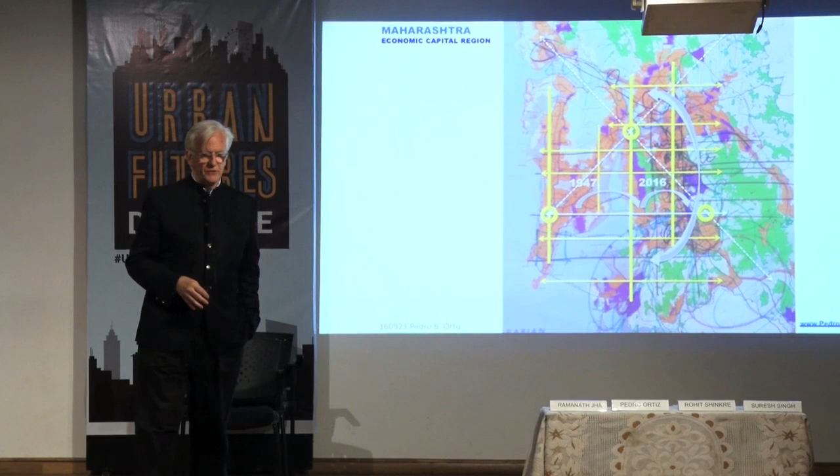And so the second day we worked on which were the main projects that had to be developed for Mumbai, and I'm going to go through those basic projects. But basically the fact is that Mumbai is growing—

—not very fast, and that is good and that is bad. It's good because if you are not growing very fast, you are able to manage that growth. But it's bad because if you are not growing fast, it's because you are not doing well. The faster you grow, it's because you are more attractive, you are creating more jobs, people think it's a great city and they want to come, and then you are overwhelmed by growth.

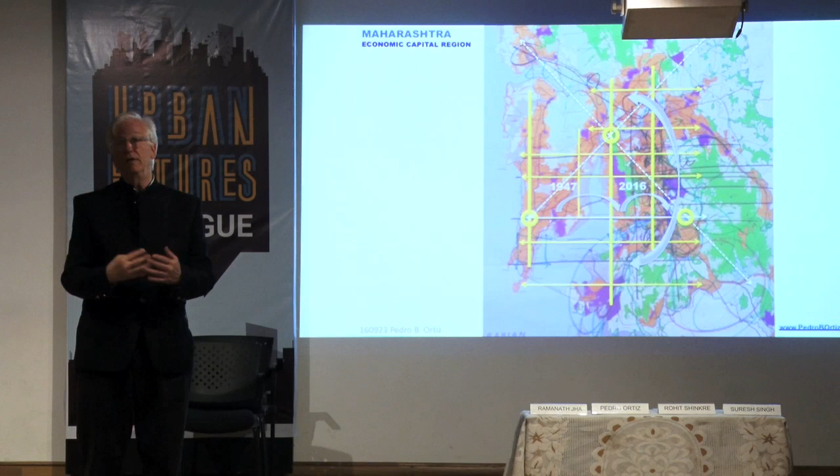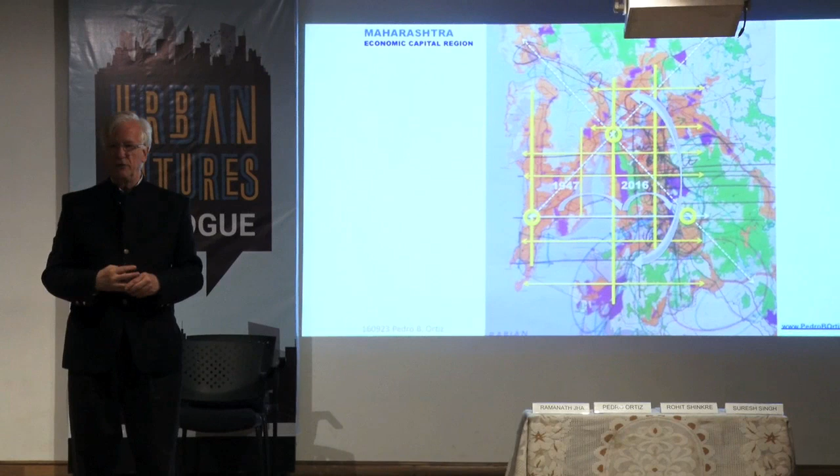For instance, Pune is growing at 10 or 11% every year. Mumbai is growing at 2-3%. You were growing at 3% and now you are growing at 2%, which is not a huge rate. But when you grow at 7%, when you grow at 5%, that means you double the size of your city in 14 years.

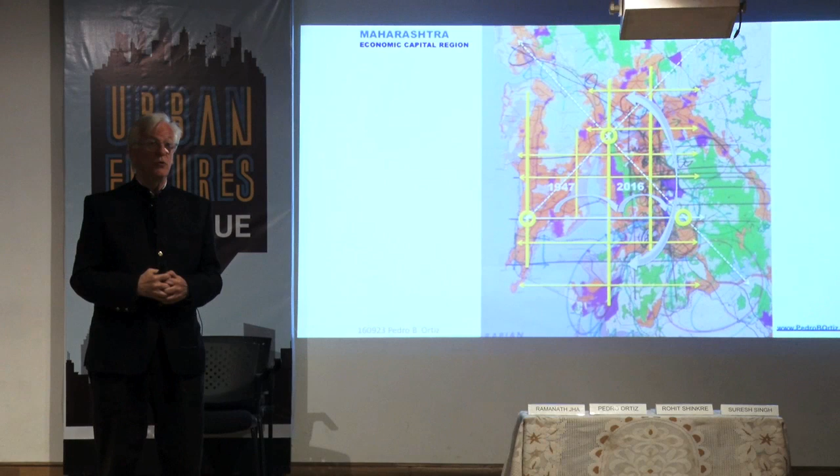When you grow at 10%, like Pune, you double the size of your city in 7 years. When you grow at 2-3%, like Madrid when I was in charge there growing at 2%, that's not population growth—growth is not based on population, it's based on wealth. The wealthier you are, the more universities, hospitals, commercial centers, and bigger engines in your cars, but the smaller your family will be.

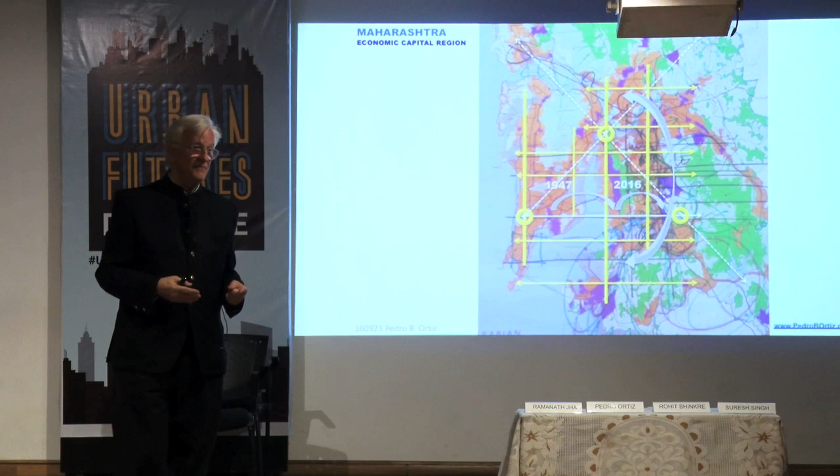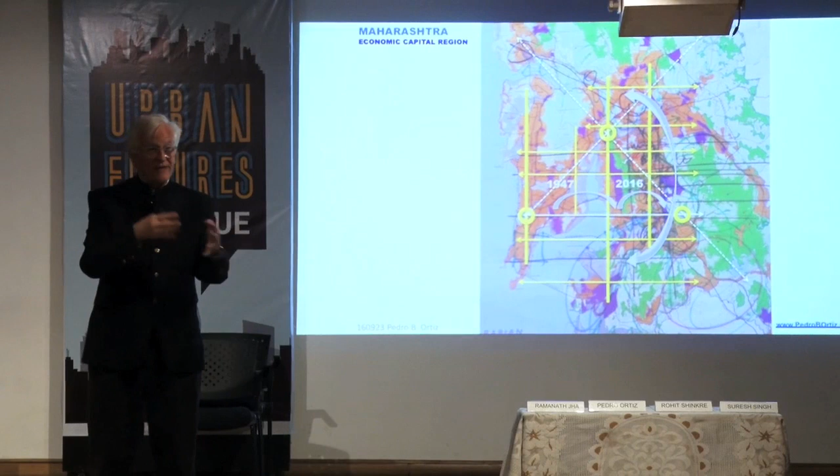Developing countries have families of 5. Spain, when I was your age, the average family in Madrid was 5, now it's 2.5. We have not grown in population, but if you have a family of 5 in a house, and 25-30 years later you have 2 families of 2.5, you must build another house for that extra family, even with no population growth.

I'm telling you things for the next 25 years, so you don't keep it in your subconscious and then react when it happens. Madrid was growing not in population but by 2.5% every year in urban land—and every 20 years that means 50% growth, because it's exponential, a geometrical curve. Mumbai, with 2-2.5% growth every year as a metropolis of 23 million, needs 10 square kilometers of land every year, while Madrid is a small metropolis of 7 million.

Let me go beyond the slides to frame the message. 10 square kilometers of land is all the historical center of Mumbai, from coast to coast, from almost the airport to the Taj Mahal, to the Gateway of India—it's a huge amount of land. And if you don't produce that amount of land, it's going to happen anyway, but uncontrolled, in the wrong positions, in the wrong locations.

If we do things wrong, solving the problems we've created costs between 3 and 9 times more than doing things right from the beginning. So if we say we don't have money to do things right, well, in 20 years you will have even less money to do things that will cost 3 to 9 times more than doing it right from the start. Those figures are from UN Habitat and the World Bank.

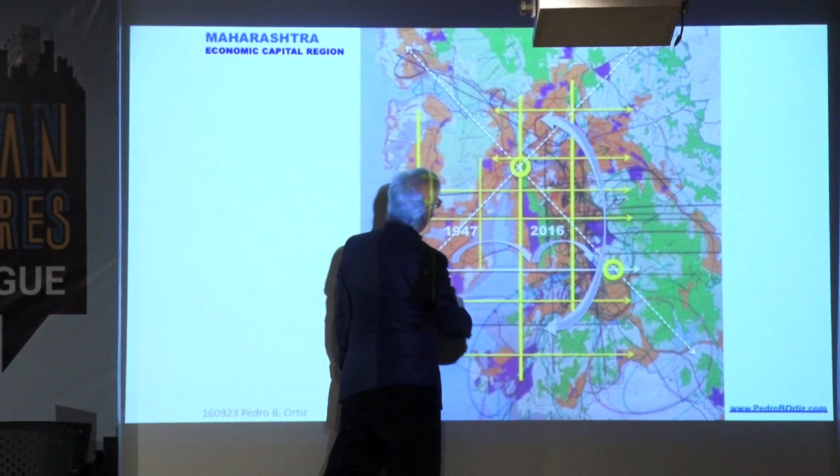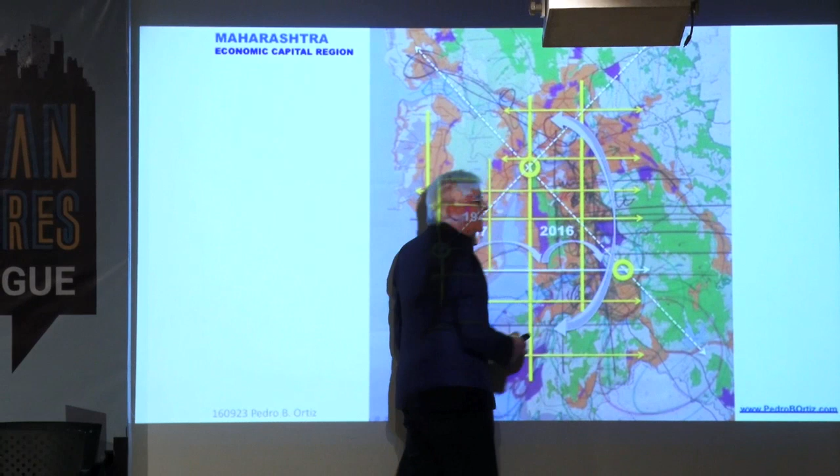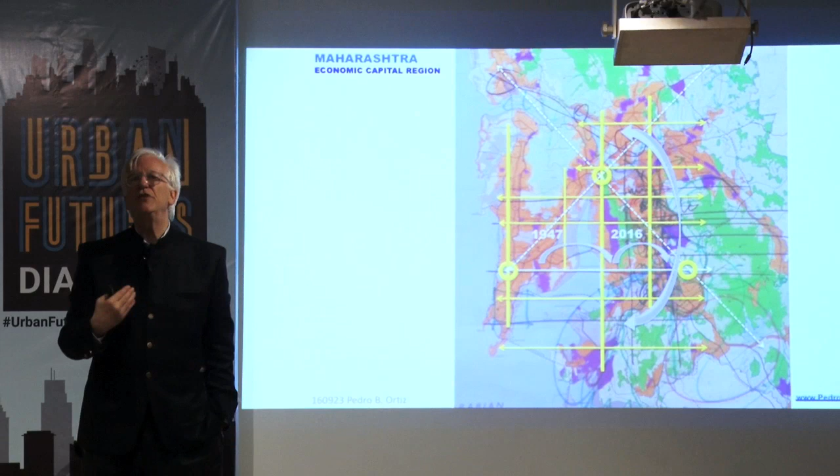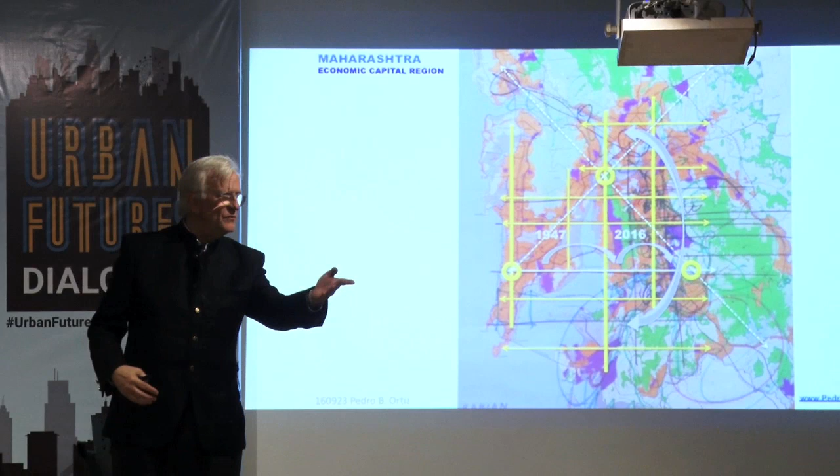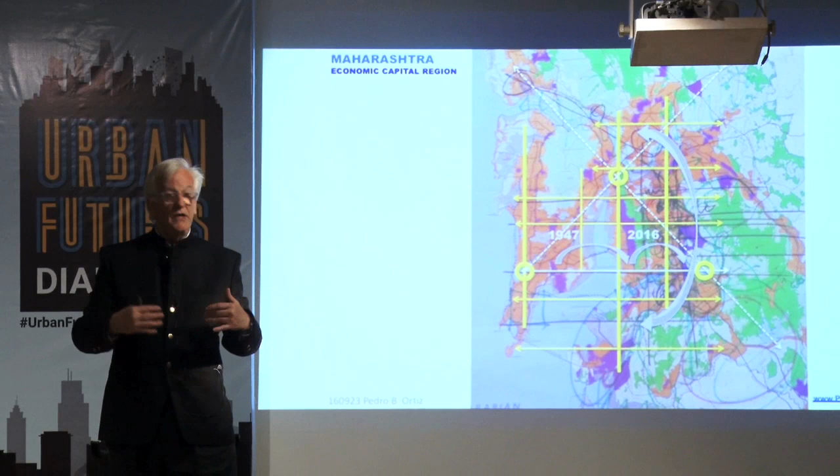Every year 400,000 people come to live in metropolitan Mumbai. That's 100,000 families, so every year you have to make 100,000 dwellings in the right location. And the right location isn't just anywhere dense—there's a limit, you can't have 30,000 people per square kilometer living without hospitals, parks, and other places. So really you have to expand Mumbai in that dimension because it is our duty to respond.

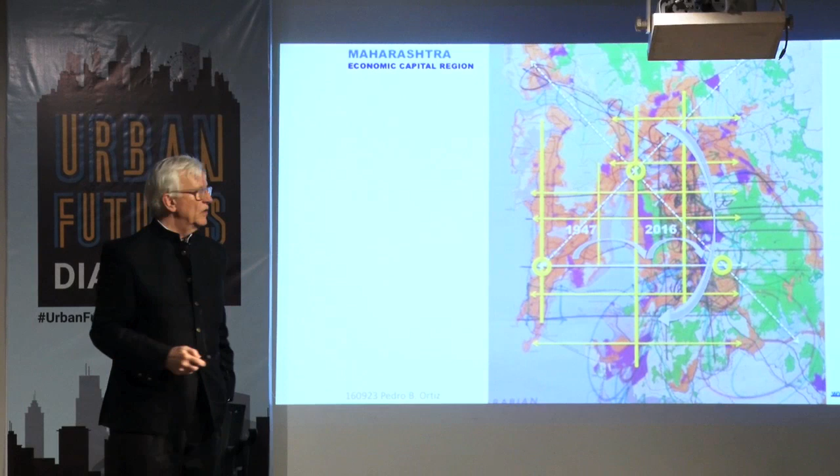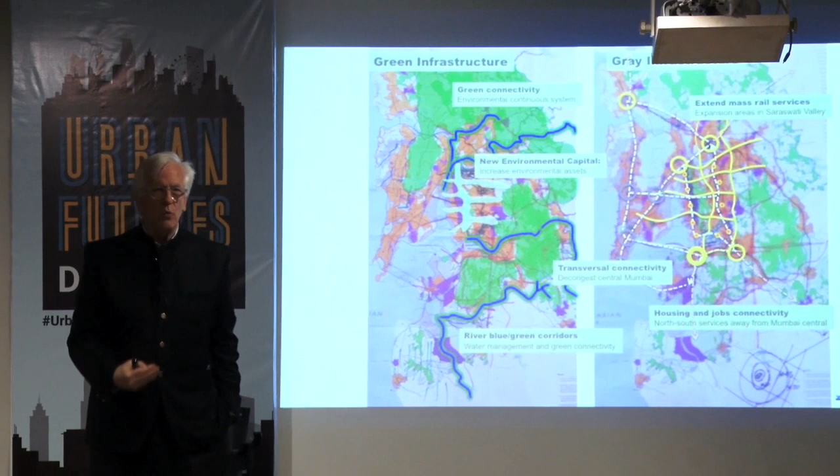In the metropolitan planning workshop, Metropolitan Intelligence, what we saw is that Mumbai has a set of parallel lines, because metropolises are metropolises because they are always located in a strategic position, in a strategic location.

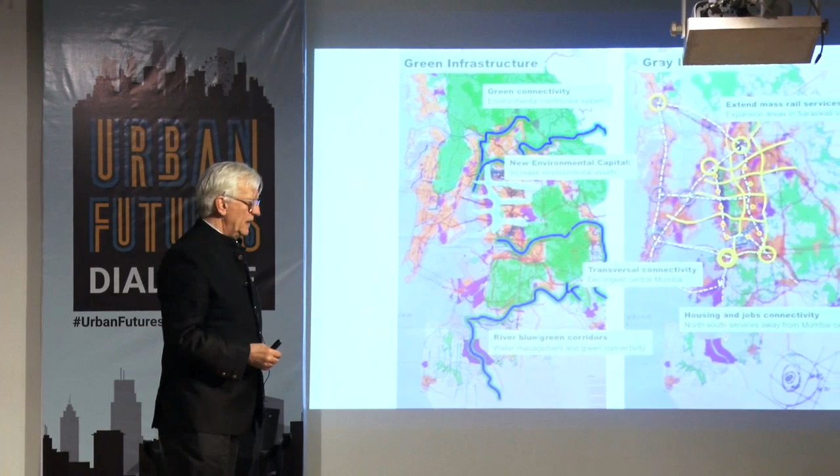Have you done town planning? You may have come across central place theory. A German guy in 1933 said that when you have a featureless plain and you throw down cities and villages, they locate themselves in a hexagonal pattern—the big one surrounded by peripheral ones. But the main issue is that it has to be a featureless plain, with no geographic characteristic, for that mathematical geometrical rule to apply.

But when you have a metropolis, it is a metropolis because it controls the passage between two ecosystems. That's why it is a metropolis. Mumbai is extremely evident, no?

But New York is as well. New York was the exit of all the Mississippi River production through the Great Lakes down to a canal they made in 1825, the Erie Canal. It was the gateway for all the goods of America to Europe and vice versa. That's why New York became New York and then a financial center. Even now that the canal isn't useful, they are still the financial center of the world.

London is London because when Julius Caesar decided to invade England, he had to make a bridge, and that bridge had to be a pontoon bridge instead of being solidly cemented. You cannot make a pontoon bridge where the tides go up and down, as they would break it, and you'd end up without a bridge after a week. So he had to find the place where the tides went to, which became London.

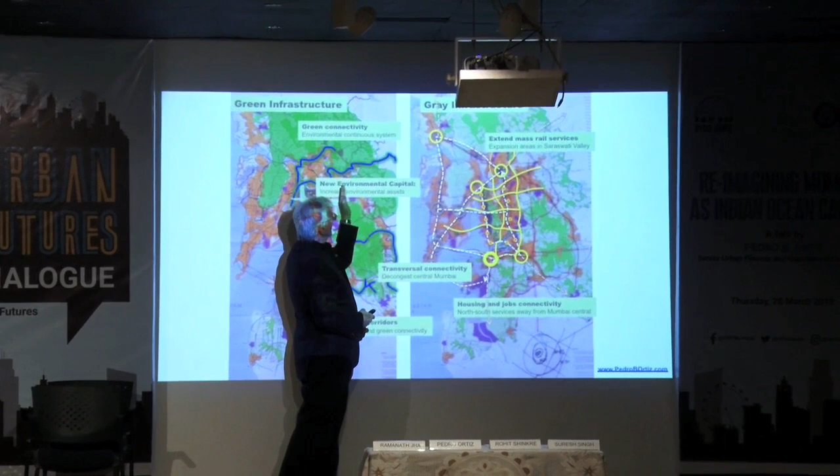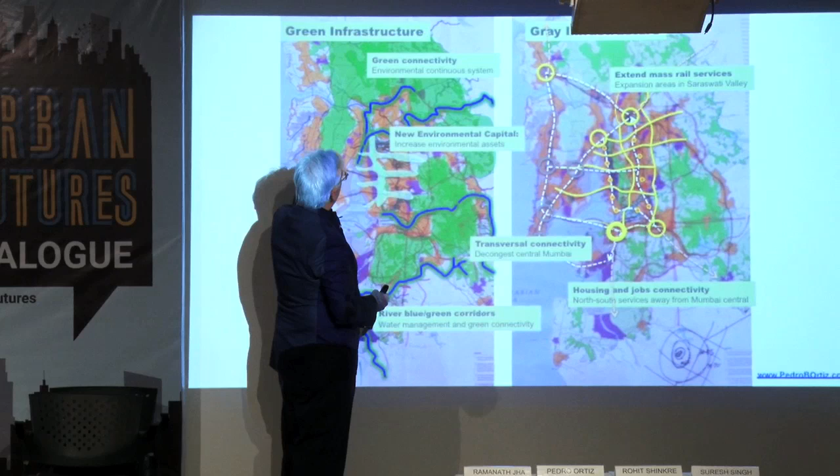So it's parallel lines that are north-south, and what you have to do is link those parallel lines through the green. That link is generally done through the waterways, the rivers, which are perpendicular to the coast, and you build up a continuous system out of the green. Metropolitan planning has nothing to do with urban planning. Forget all you know about urban planning and think in a different way. This is one of the ways.

In metropolitan planning there are 5 systems you have to integrate. One is environment, the other is transport—we call this green infrastructure, gray infrastructure—housing, productive activities, and social facilities. That's your job, integrating those 5 systems.

But out of those 5 systems, 2 are continuous and 3 are discontinuous. The continuous systems are the green infrastructure and the gray infrastructure. You cannot have a kilometer of train, then nothing, then another kilometer of train—the train has to go through. When you arrive at the station you get down and take a bus, a taxi, a bicycle, the last mile or whatever. So it's a continuous system that has to be linked together.

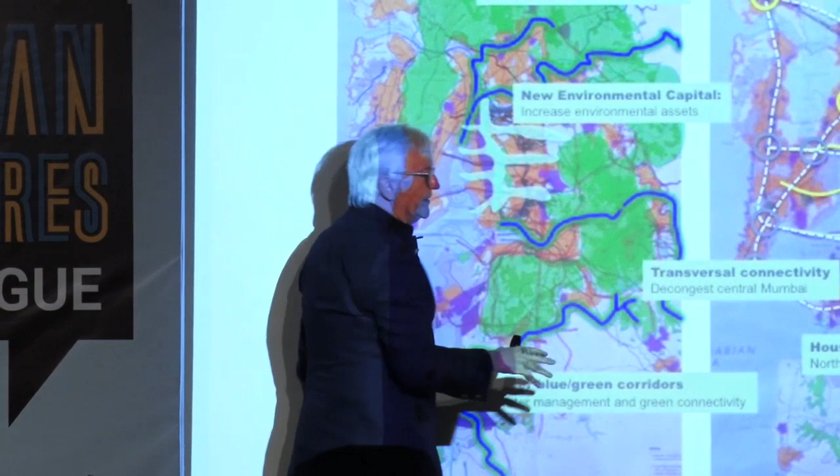So basically, that's it—you have to link all these green spaces together. You have protection in Mumbai, but it's scattered protection, and you really must link it all together. Normally you link that through the waterways, which are perpendicular to the main lines of the metropolis, and that's the way of linking.

And then with the network of roads and the network of trains, again you have parallel lines. It's not making circles around a metropolis, because at the end those circles create a monocentric metropolis, and when you create a monocentric metropolis, what you're fostering is the congestion of that center.

The circles were invented by a guy called Otto Wagner in 1912. He invented the Großstadt in Vienna, but that was a century and a few years ago. And since then, civil engineers—now I'm going to go against the civil engineers—since 1912, Otto Wagner, he was an architect, a very good architect, but a bad planner.

You are good at one scale, but you are not good at the next scale. It's like writers: you might be a good poet, but not a good novelist. You might be a good novelist, but not a good essayist, not a good theater writer. You have to understand your limitations, where you are good at.

Otto Wagner, Vienna in 1912, he said, Vienna is growing, let's make circles around it. He made the project of the Großstädte of Vienna. Since then, civil engineers have been copying that, and whenever there is congestion in a metropolis, they make another circle, and that becomes an onion ring, all monocentric, with everyone trying to come to the center.

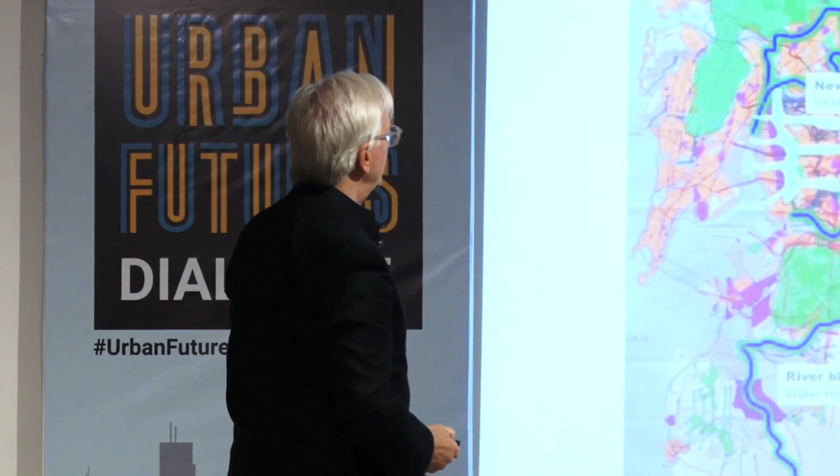I was very happy to see that this result from two years ago has been taken on by MMRDA, and they have revised the gray infrastructure plan of Mumbai, and they have introduced this vision.

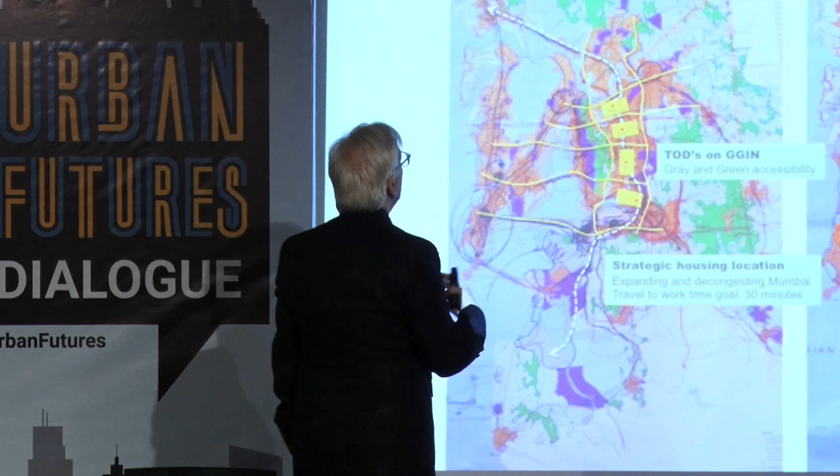Then you have the housing, and housing in a metropolis has to be linked to the center by commuter rail. BRTs are not enough. BRTs, the articulated buses, are an urban solution, not a metropolitan one. Even the metro is not a metropolitan solution, it's an urban one. The metropolitan solution is the rail.

And you have a wonderful rail network in Mumbai that you are using very well. That's why Mumbai works better than many other metropolises in India and around the world. But you have to expand those rail tracks, or at least the rail service.

And the way a metropolis works is polycentric. You have different centers, and each of those centers has to play a different role. So you have to create those centralities and give a different role to each. That is the basic of a metropolis.

So you have those possible centralities in the next valley. This is Navi Mumbai. And you have there the possibility of creating room for 2 million people. Navi Mumbai is 1,100,000, so you have the possibility to create 2 Navi Mumbais, linked by train and not linked by car and so on. So that is your possibility.

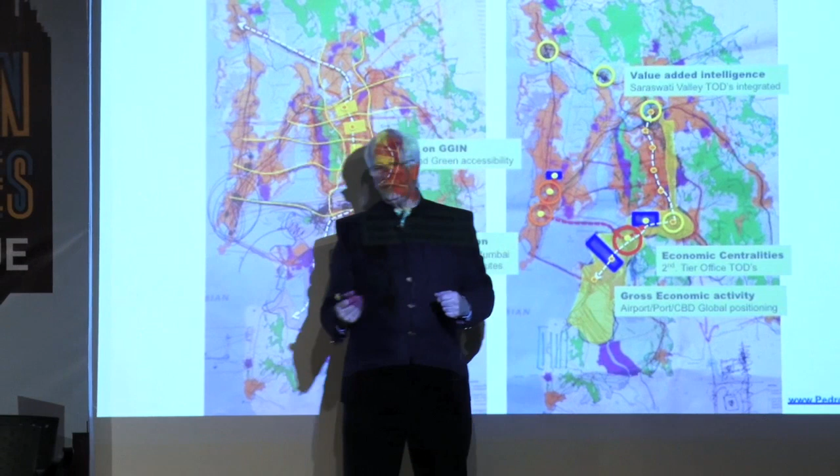And then the productive activities: you have the port that is going to move, it's already moving. But to be wealthy, you have to add value to the products you produce. That's the basic of wealth.

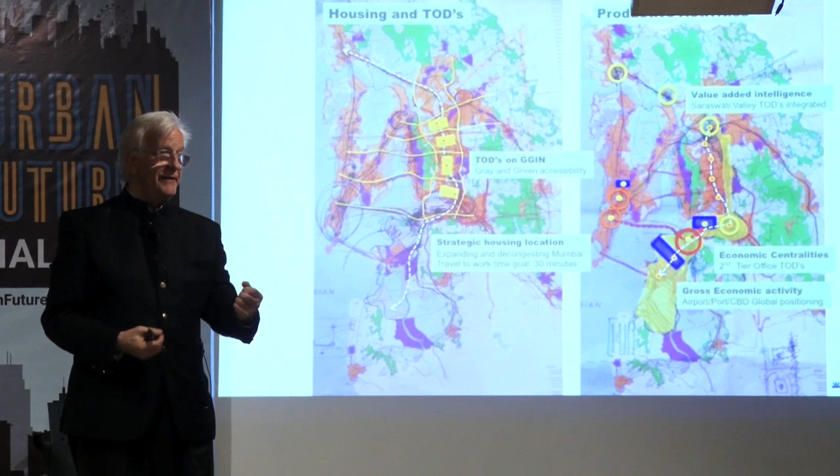The Italians, in Milan, buy a piece of fabric from wherever, worth $10, and Versace makes a skirt for girls worth $4,000. From 10 to 4,000 - that is innovation, that is creativity, that is added value. So to reach the level of developed countries, what you have to do is add value.

Things that have a lot of value added don't take the boat, they take the plane. Things that have a lot of kilos and very little value - iron, steel, coke, carbon, coal - go by boat because there are a lot of kilos. But a computer doesn't go by boat: $2,000, 1 kilo, you take the plane.

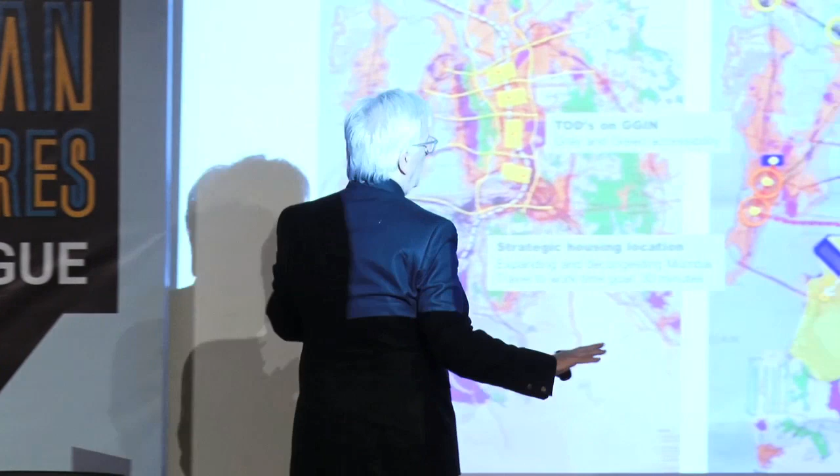So the future of Mumbai, if you want to be like New York or Beijing, is the plane. The port of Mumbai is fine, it's not bad to have a good port, but it's going to be the airport of Mumbai. And that airport is not enough.

If Mumbai wants to be the capital of the Indian Ocean, you need an airport for 150 million passengers, and each runway can only hold 30 to 40 million. You have an airport with just one runway in the center of Mumbai - it is exceptional, with 40 million passengers because you use it 24 hours a day. It's very crowded, planes land one after the other, there is risk, lack of security, and it's overcrowded.

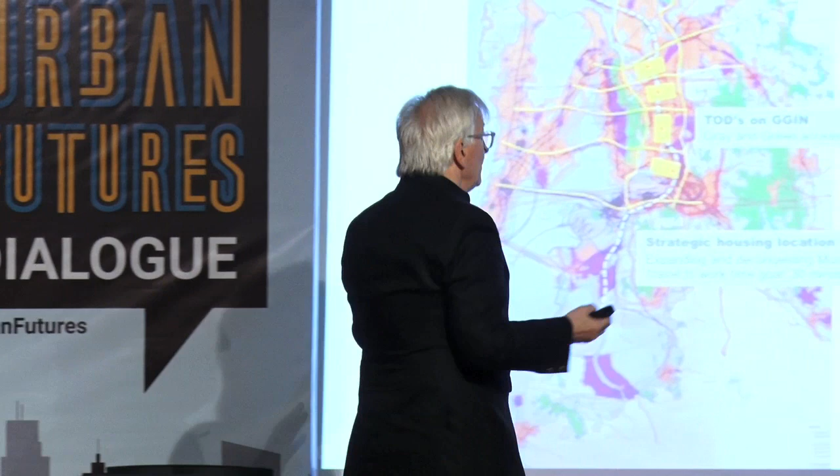Because of climate change, the sea level is going to go up, and that area is going to be flooded. But for the next 20 years, you have this airport, so let's make the best use of it. It's better to have an airport for 20 years and then get rid of it afterwards than not have an airport, because you have lost then your position in the world.

And I was telling this at lunchtime, we were having a discussion. There is a wonderful Argentinian sentence that says a crocodile that gets to sleep becomes a handbag. That means you have to take the right decision in the right moment, because if you don't take it, someone else is going to take it for you. And then you become a secondary metropolis in the world.

So if you don't take the right decision at the right moment... that's why it's better to have a wrong airport than not to have an airport at all. And the amortization of airport investments is extremely efficient. In a few years, the benefit of having an airport is that it's the exit point for all the added value produced in your economy, if you become a developed economy.

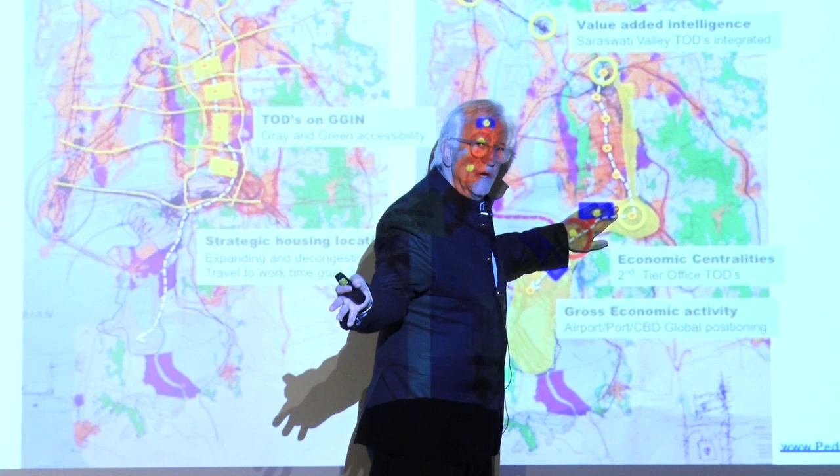That added value can be produced in that valley of Navi Mumbai, which I also call Saraswati Valley, because it's the Silicon Valley, the knowledge valley of Mumbai. There you have something like 40 square kilometers of land for productive activities, industries, research, laboratories, and so on. That's 400,000 jobs—40 square kilometers at 100 jobs per hectare. So that was the proposal 2 years ago from the economic group.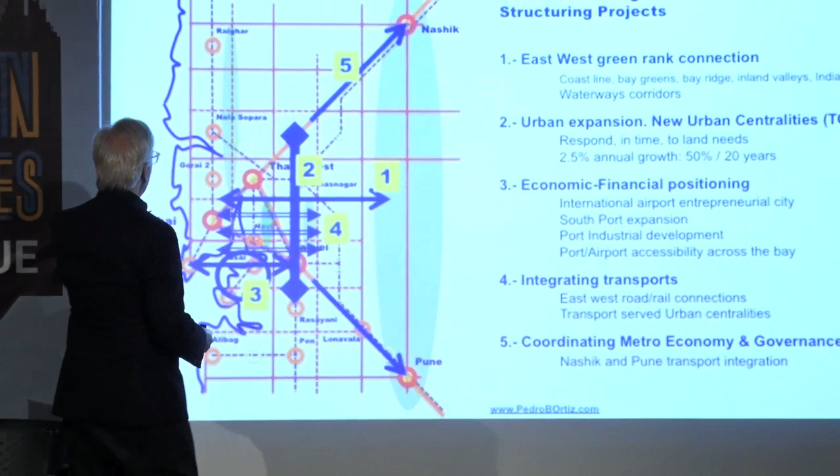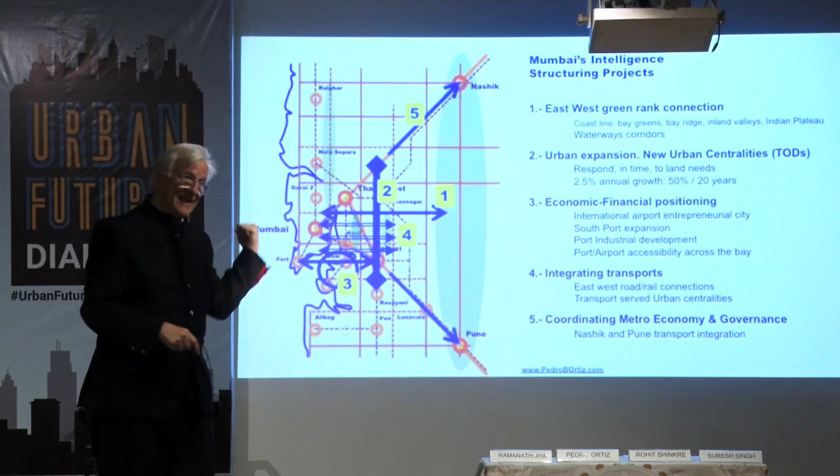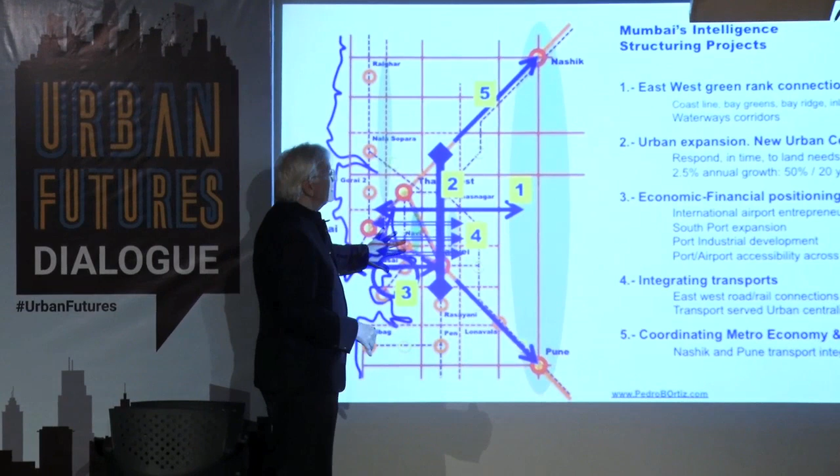So at the end, you have this kind of diagram. I'll go there later on, because we are the only ones able to make that kind of diagram. We architects are the only ones able to understand space and to make an abstract diagram of that space. I'll go into this diagram later. This is Mumbai, and immediately in that kind of diagram you see what is missing, because we've made the diagram and we understand space.

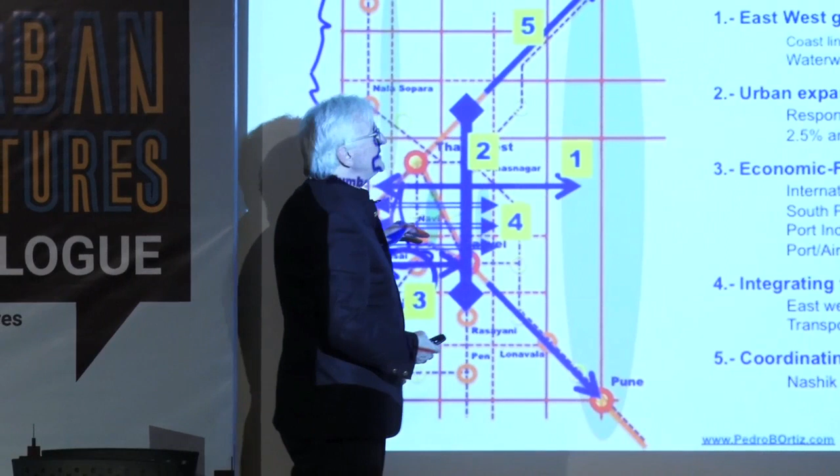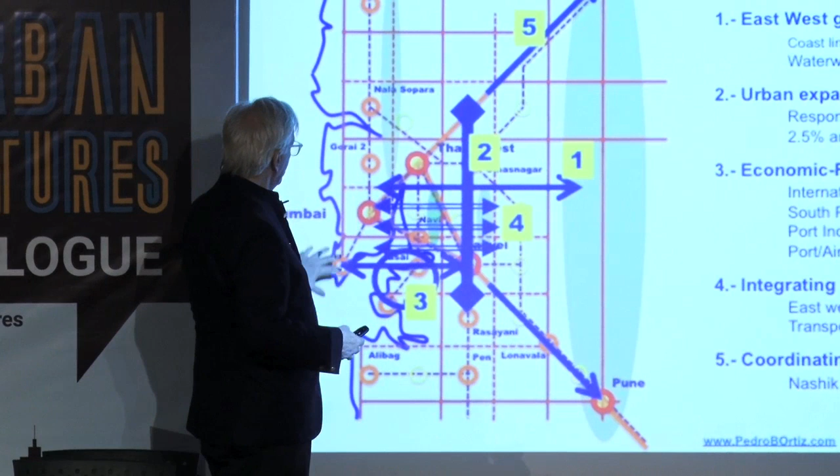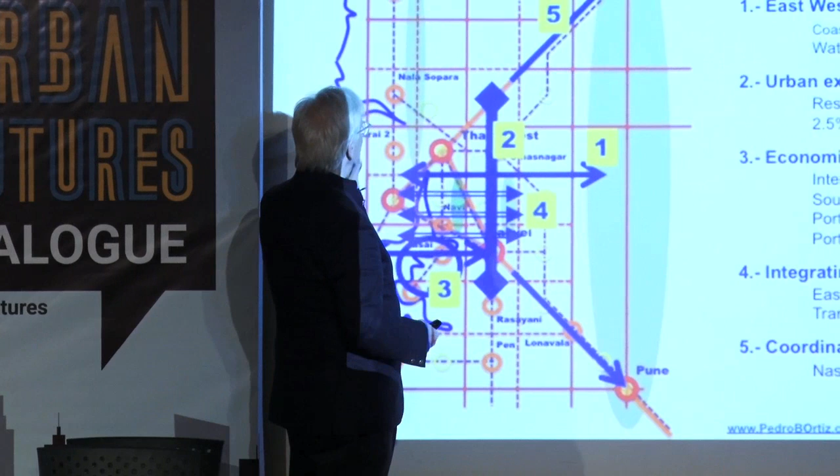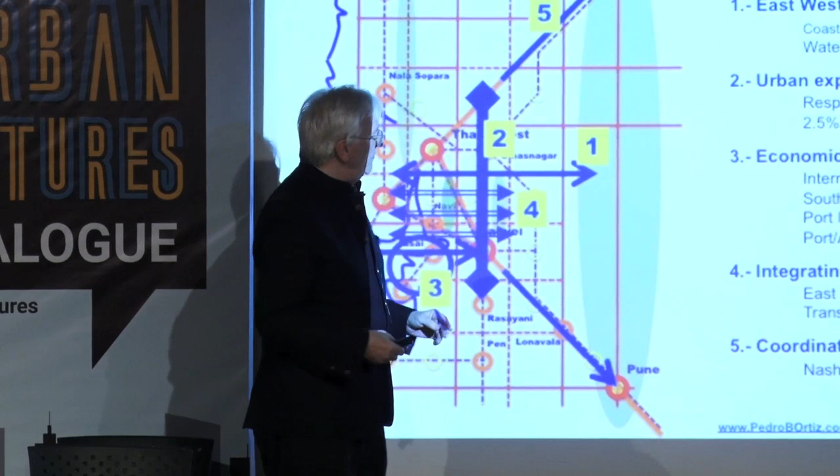It's obvious that what's missing in Mumbai is an east-west green connection of the different green spaces. It's necessary to have the urban expansion of that Navi Mumbai with all these urban centralities and TODs, the economic positioning of Mumbai in the world and in the Indian Ocean, which links to the airport, and the development of industrial, tertiary, and research production strategies. Instead of playing north-south, what Mumbai has to play is east-west, creating transfers between all these parallel lines among themselves, integrating transport and coordinating the metro economy and governance.

That's more a matter of politology, of institutional integration that now is a bit disintegrated. So you immediately see from this diagram what you have to do. I was very happy to see that MMRDA in the last 2 years took on these proposals and made comprehensive traffic studies. Before, 2 years ago, the proposal was just a black line, invented by one of the secretaries of transport who said, let's make a highway there. Now they've taken over a proposal that is consistent and really is the skeleton of the metropolis, and it works. I was very happy, and I congratulate them.

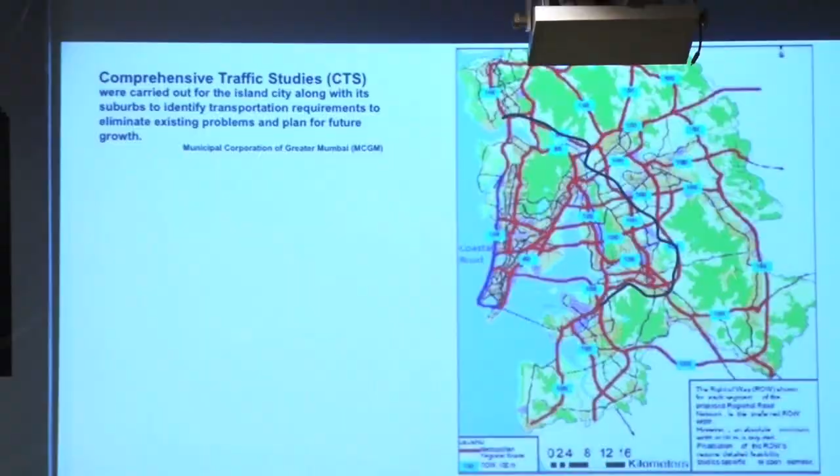All these projects are like cherries—you take one cherry and the other cherries come along. All these projects are integrated; you cannot make one if you don't make the other, because they address the whole problem of sociology, economics, physical planning, governance, environment, and so on. What you can do is select which cherry you pick up first, but once you pick one, the others come. You must realize you have to do all of them, but they come naturally. Once you do the train, then you need the housing. Once you do the housing, then you need the jobs. So it all goes together, and it works.

What I suggest is to think out of the box. Don't think the problems of Mumbai are solved in Mumbai—they are solved outside Mumbai, because Mumbai is already a metropolis. So you don't solve the problems of Mumbai within the municipality of Mumbai; they are solved in the general context. It's like the quiz: you have nine points, four lines, and how do you link them?

There is always going to be one loss. It's only when you think out of the box, you go out of those 9 points, that you can link them. So think out of the box, and Mumbai needs to take the cork out of the champagne, because Mumbai is under pressure.

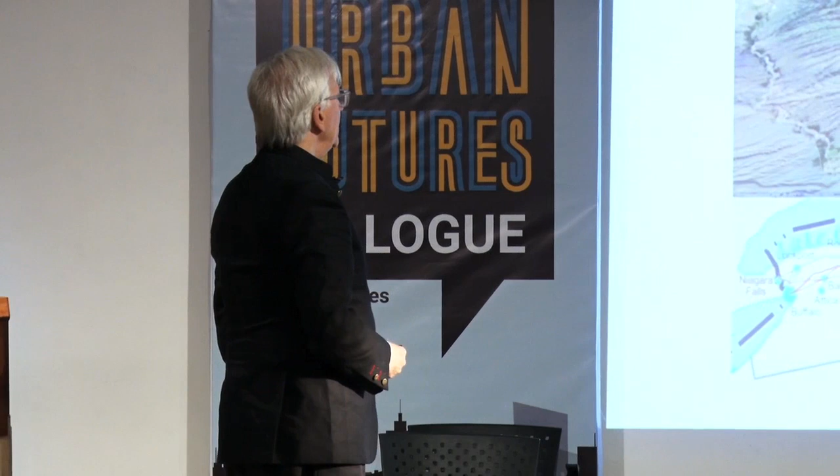And if you still try to solve things within Mumbai, you are not going to be able to solve it. So you have to think big and think in another direction. These are examples of New York, London, Paris, as I said before, a metropolis is a metropolis because it has a directionality and a transversality, a generatrix.

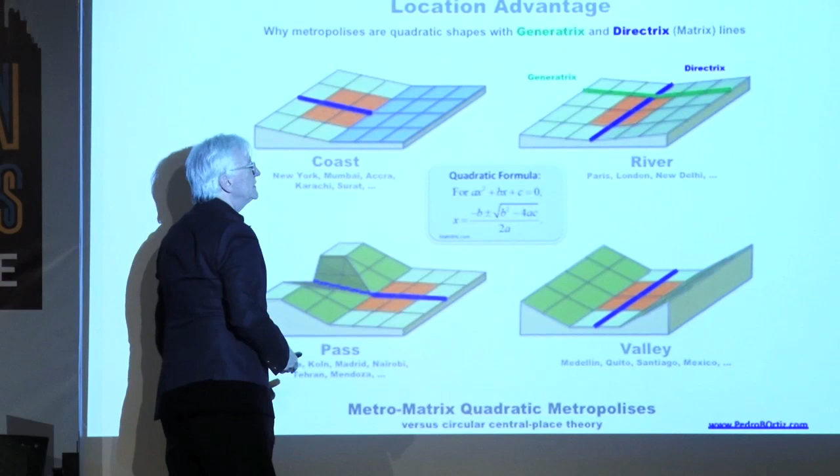And there are only 4 types of metropolises. The metropolis which is a coast, and Mumbai is one of them, New York, Mumbai, Accra, Karachi, Surat. The metropolis which is a river, Paris, London, New Delhi. The metropolis which is a pass, Bogota, Koln, Madrid, Nairobi, Tehran. And the metropolis which is a valley, Medellin, Quito, Santiago.

We have a problem when the metropolis is circular because of something in economy called economies of scale. The more you have, the more you will have. So the wealthy people live here because that land is the most expensive land, since it has the most infrastructure. So to make it more productive, you have to invest more there. And the poor people live around, and you don't invest there because it's not as effective, and you care about social equity, and obviously you have to invest, but you are not very keen on investing there, because it's a lot of land and there is very low.

And that is a basic dichotomy of the politicians, of the government. You have a limited budget, and you have to decide if you are going to invest in economic productivity and efficiency or in social equity. And there is no technical solution for that balance.

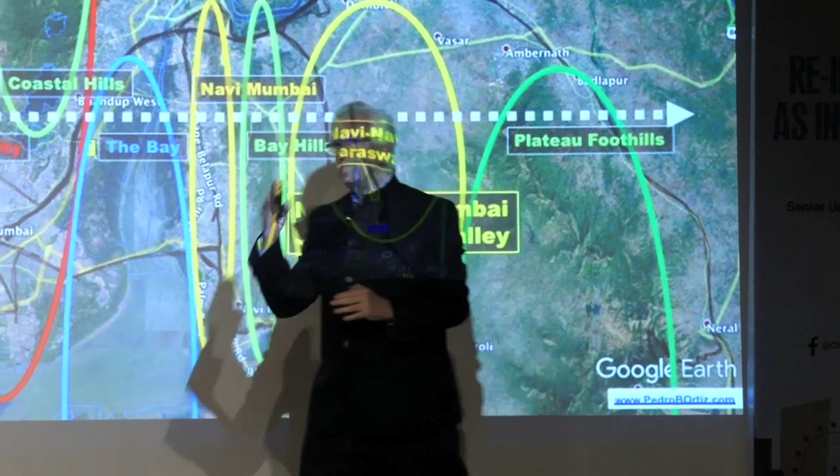Mumbai metropolis, the diagram. You must understand, as I mentioned before, you have the coast, the city, the coastal hills, the bay, Navi Mumbai, the Bay Hills, the plateau foothills, and then the Indian Plateau. You see perpendicular lines, north-south, and what you have to do is connect that in an east-west way to make a system, not disaggregated units.

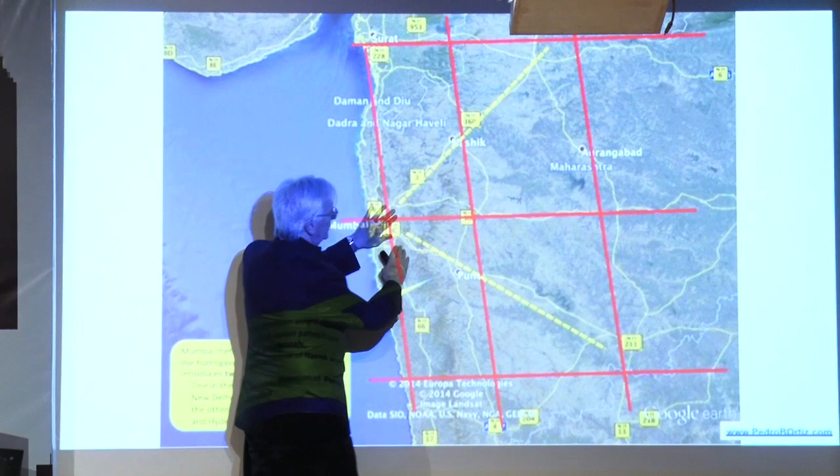And then Mumbai plays an important, essential role in India. I'm not going to go into that now, later I will go into India. You have these two diagonals to New Delhi, to Bangalore, to Chennai, and to Hyderabad, which break the reticula of India.

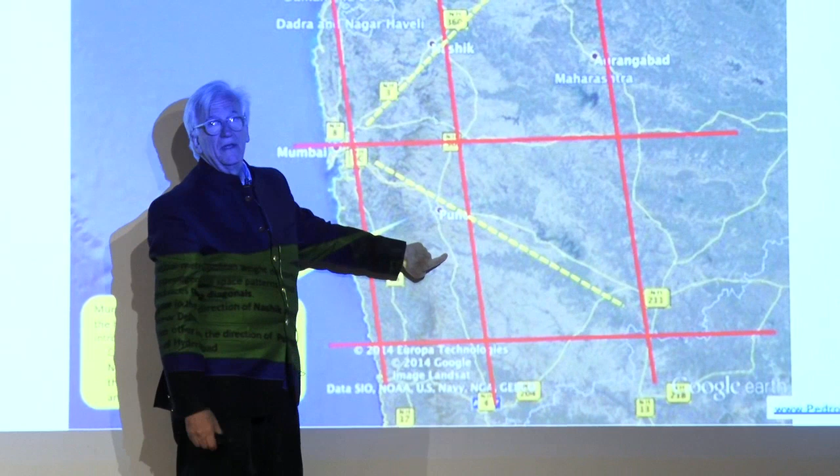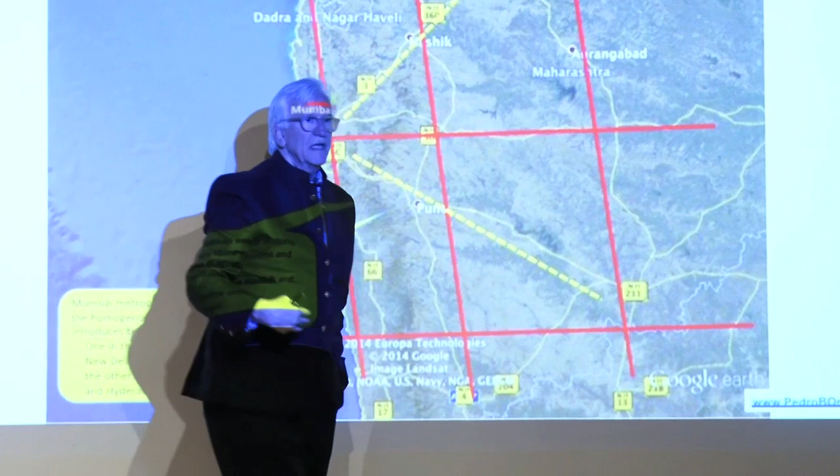As you see, these red lines follow the roads that already existed. Our predecessors were not stupid, and they had 5,000 years to make a decision. Not like us, we have only 6 months to make a decision. So they could play with trial and error, and they understood the territory, and knew where to put the cities. They knew something that we have lost since. So I am only reading what is already there, the roads that were put there by previous generations, and that gives you the sense of the structure of the place.

That's the DNA of the region, and you have to play with that DNA. As architects, you know perfectly well that you have to make a project that fits into the DNA of the location. That's basic architecture. So you have two diagonals related to a larger scale economic positioning of the Ganges Valley and so on.

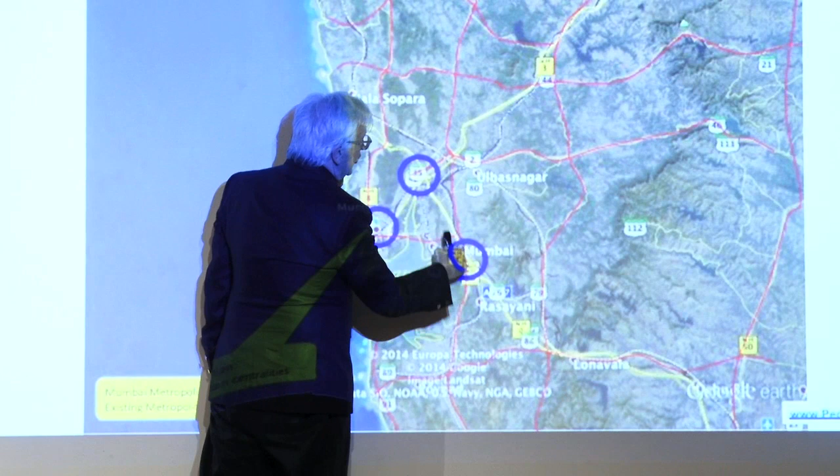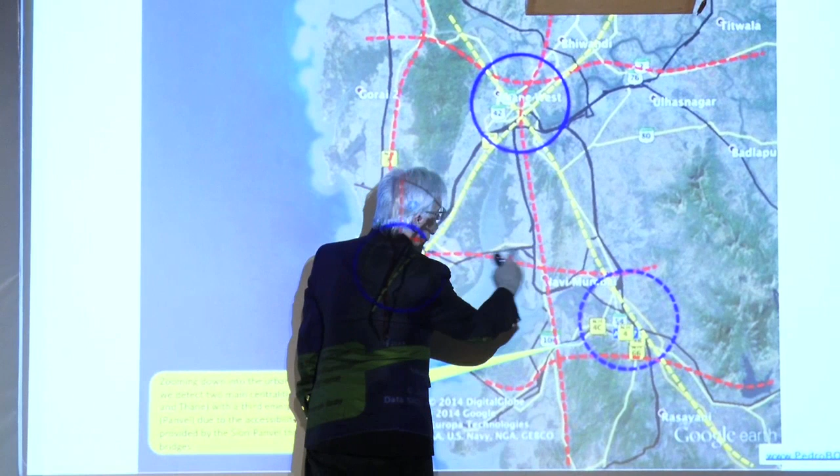And then, as you have the bay, those two diagonals, instead of going directly to Mumbai, because they did not have the capacity to make a bridge across the bay, go to Thane in a kind of squeezed diagonal. That is the basic structure. Once you had the money and the engineering capacity, you made the bridge. So you have these three points of Mumbai's structure.

And then you have other centers that each have to play a different role. I'm not going to get into that, but every one of them has to understand the role. When I received the mayors in my office, I told them, your role is to be a knight, or your role is to be a bishop, or your role is... And I used to go to the wall, I had this chess set on the wall, and I took the piece and gave it to him. So he went back to his municipality looking at the piece and hating me because I was defining the role for him.

I used to tell them, if you want to play another role, you are the mayor, you can play whatever role you want. But if you want to be a queen, you are going to miss the whole thing and spoil the budget of your people. So be reasonable and try to play the role that you can play. But it was not forcing them.

That's essential in a metropolis, completely different from cities. In a city, you have a mayor, deputy mayors, directors of departments, services, and the population, organized in a pyramid or in a circle. So it's a unitary system. And there, what is essential is the bottom-up, top-down dialogue.

You have to listen to the population, you have to respond, you have to make proposals, and they have to accept it. It's bottom-up, top-down. In a metropolis, that's nothing to do with it. In a metropolis there are 18 or 100 municipalities, different secretaries, ministries of the state, the water agency, the power agency, and each of them, in a democracy or non-democracy, has their own competences.

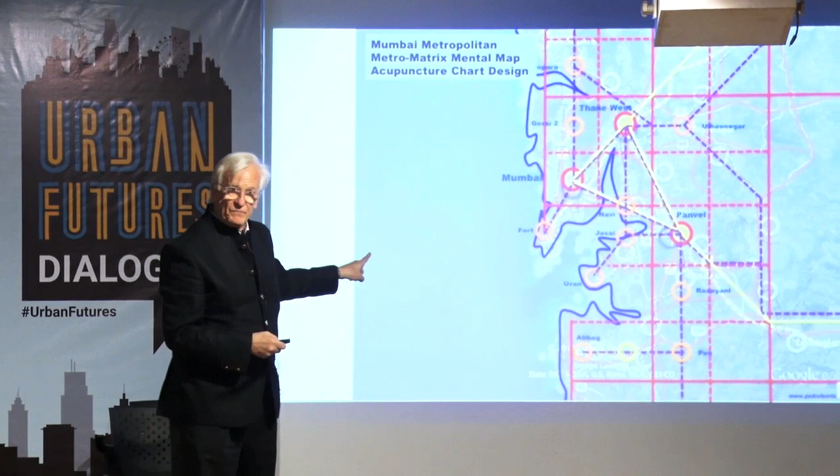Anyway, each of those metropolises has cities, and this is the diagram. You say that the map is still under there, no? And you architects are the only ones who understand that. Then you take the Google map underneath, and this is the diagram, and immediately you see what is missing. This is missing, this is missing, that is missing. You immediately see what is missing.

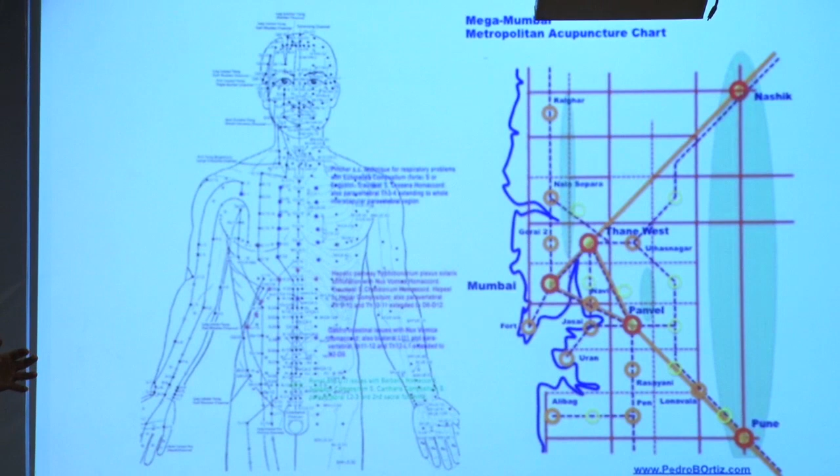In a metropolis, different from a city, in a city you define every one of the plots, and you can say this is the hospital, this is going to be residential, this is going to be the station, and so on. In a metropolis, you cannot control every plot because you are dealing with a state, a size. So what you do is metropolitan acupuncture.

What you do in a metropolis is understand how the body of the metropolis works, and then you put the needle in a place that is going to have an effect on the whole metropolis in the way you want that effect to be. But obviously, to put the acupuncture needle in the right place, you have to have the acupuncture chart. You must know what the role of each of those points is, and that is what that diagram does. This is the role.

These are the main international centers. These are the secondary centers, and so on. Only if you have a metropolitan acupuncture chart will you know where to put the needle.

If you don't have the acupuncture chart, then what you are having is the strategy of the mosquito: wherever there is a bit of skin open, I will put my needle, suck all the blood I can, and go somewhere else to suck the next blood. And I'm not only talking about developers.

Who is a developer? Great. I am talking as well about a mayor, who says, well, we have money to make a hospital. John, where do we put the hospital? Well, Mr. Mayor, we have here a plot of land, we don't know what to do with it, let's put it there. That's the mosquito strategy of not understanding the metropolis, and the vocation of that plot might be completely different.

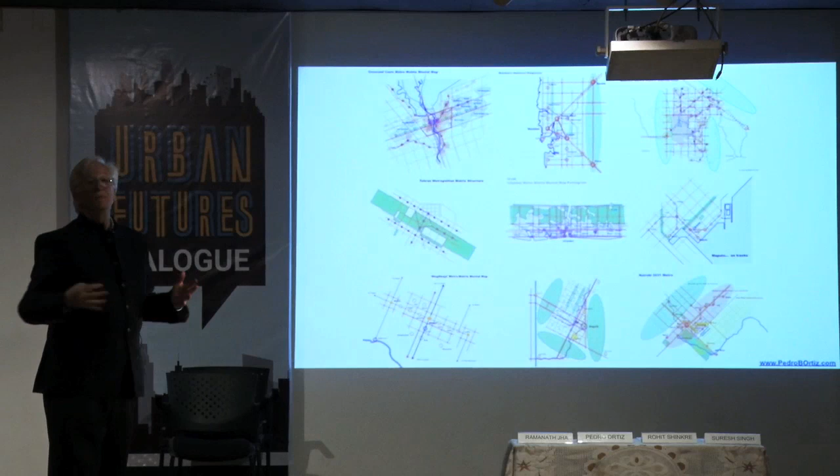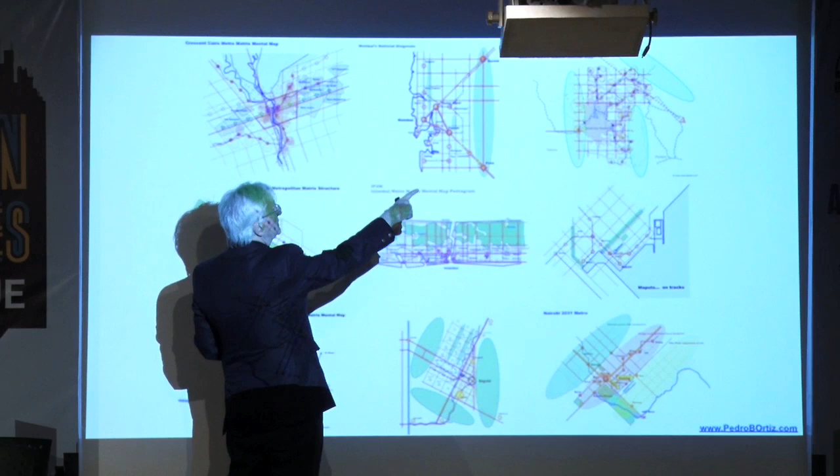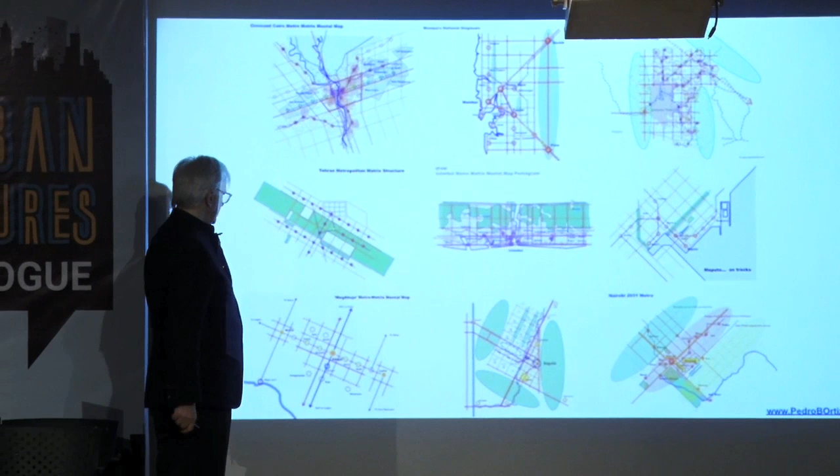Every metropolis has a different acupuncture chart, and here you have 9 metropolises around the world, but I can show you 130. You have to understand that. This is Mumbai, this is Cairo, that is Mexico, this is Tehran, this is Istanbul, this is Maputo in Mozambique, this is Nairobi in Kenya, this is Bogota in Colombia, and this is Abuja in Nigeria. And then you immediately see what is missing.

Architects, a roof truss. In a roof truss is what we used to call an isostatic structure. You have all done that. An isostatic structure is where every bar and every knot is necessary, because if you take any bar or any knot, the whole thing falls. So you have the isostatic structure.

These are the isostatic structures of the metropolis. So if there is a bar or a knot which is missing, your next project is to design that bar and to design that knot. And that's what we do in the Milano Polytechnic workshop that we were talking about before. We decide which is missing, and then a set of Italian and Indian students design those knots. And as it is the obvious solution of the metropolis, it's only a question of waiting time for the public authorities to realize that that is a need and to do it.

So if you have collective intelligence, the decision will be made in 4 years, and if you don't have collective intelligence, the decision will take 20 years. But at the end, it will be made because it's obvious that that is needed in a metropolis.

So those are examples. It's like you have an emoji, and an eye is missing. You say, well, I have to draw the eye. And this is an example.

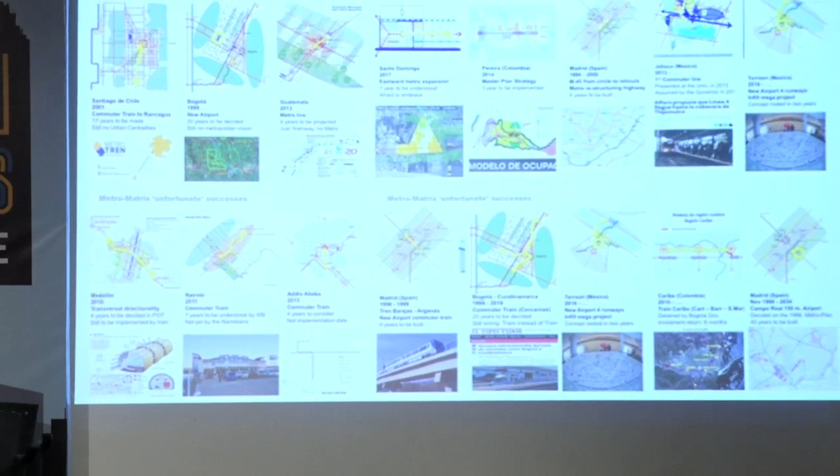And these are examples - there are 16 there, but there are 20 examples of obvious things that have been built or are in the process of being built. I am not going to get into all that.

And for instance, this kind of scales work in transport. In every one of those sectors, in transport, you have international transport, which is obviously the plane, and that's the scale of the world, 1:50 million. Then you have the national, which are the high-speed trains.

Our job as a metropolitan planner is not only to be good at that level, which is ours, but to dialogue with the other levels. And whenever you are doing a project in a metropolitan dimension, you are linked to the other levels.

For instance, I was working in an area close to the mouth of the Panama Canal, and we were dealing with geopolitics, because the Chinese were interested in controlling that land because it was the entrance to the Panama Canal, which is controlled by the United States. So when you are designing something or making a decision, you have to think about all the scales, and in this case, the scale more important was the 1:50 million. It was the geopolitics of the world.

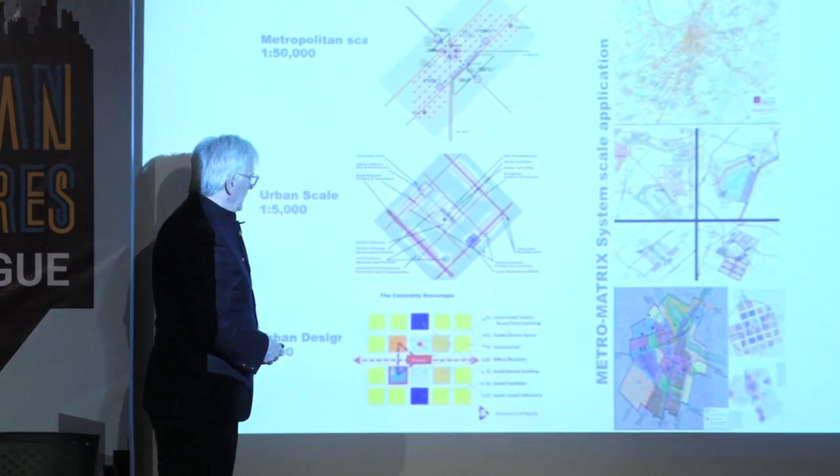And you as architects have to understand all these scales to be able to integrate those processes. So you have the different scales: metropolitan, urban. This is the master plan, and then the urban design of the TODs, the urban centrality, and obviously the diagrams are to understand that it works, and then you make the project specific, which is the job of the architect.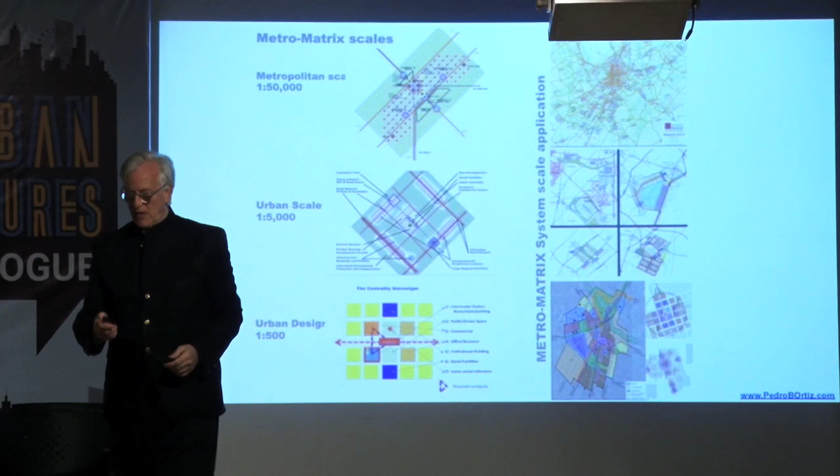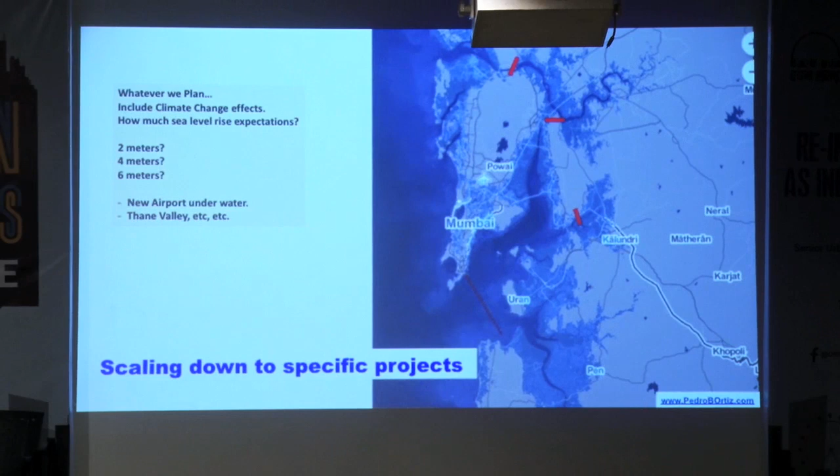You are going to have an enormous impact of climate change, and I have not heard enough discussions about it. And in Mumbai, it's going to be disastrous.

As you know, the Paris Agreement says we should target a 2 degree increase, but that would have meant we stopped all emissions a year or two ago. And we are not going to stop all emissions because we are not intelligent enough to understand that. So it's going to go on. I have been discussing this with professors at MIT and Harvard, and they say we are probably going not to 2 degrees, but 3 or 4 degrees above current level.

I don't have a slide, but when you have to deal with climate change, you only have 3 ways of dealing with it. You either confront it, you adapt, or you run away. And you take the decision depending on the amount of investment you already have in that area.

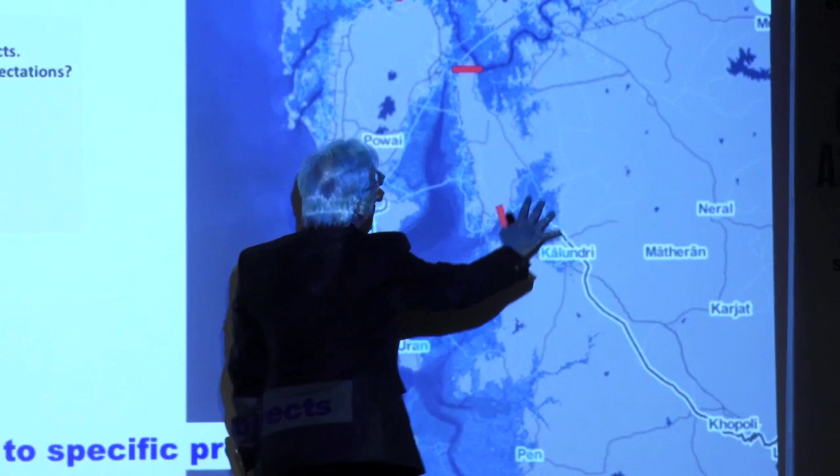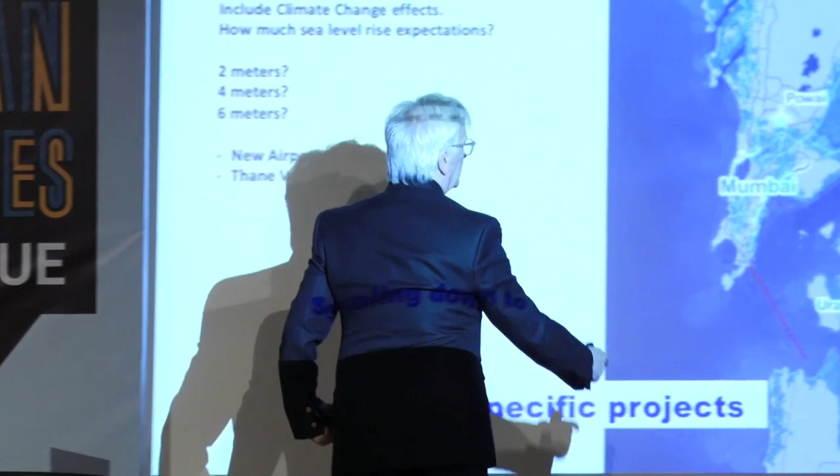You can only think - and I thought, sorry for this line, it should be here - about a barrier here, a barrier there, on the way to Thane, and a barrier there, that will protect all these areas. So what is there now will only be saved if you build a barrier, because that is a sensible investment. What you cannot build is a barrier here, that would be incredible.

So you have to start discussing climate change, its impact, and what you're going to do about it, because it's going to be extremely important. In other places it's not going to be so important - in Madrid it's going to become like Phoenix, and Phoenix is going to become like the Sahara. It's just a matter of change of water - we have the problem of water, the problem of heat. But in your case, it's really the sea invading the land in a very significant way.

This is the project of MMRDA, which is fine, is great. Working on this project, what I did is complete it. These dotted lines have not been thought of by MMRDA, and I think they should be, because the reticular, chess-like game is more

efficient than the dot game. Because in the dot game, when you have to go from one place to the other, you only have the radial road. If the radial road collapses, all the feeding routes to the radial road collapse. So it's what we call

an unstable equilibrium. Unstable equilibrium is when you have a ball like this with a small ball on top - it is in the center, it's in equilibrium, but if it moves a millimeter, it falls. And the chess game is a stable equilibrium - it's like having the ball like this, with the small ball in a bowl in the center. You move it a millimeter, it comes back.

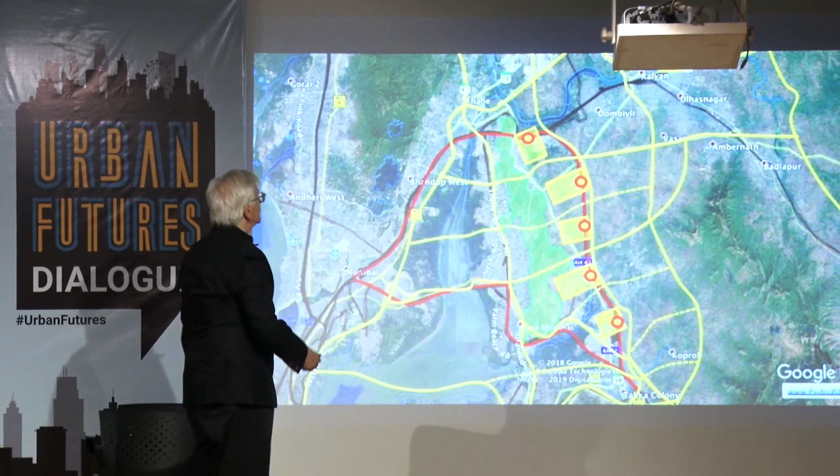As you see, you already have that train line, and you can have those centralities and those areas of housing development, and then jobs and industrial development. You already have the solution there. It's just a matter of having the collective intelligence from the institutions and organisms involved to make those decisions.

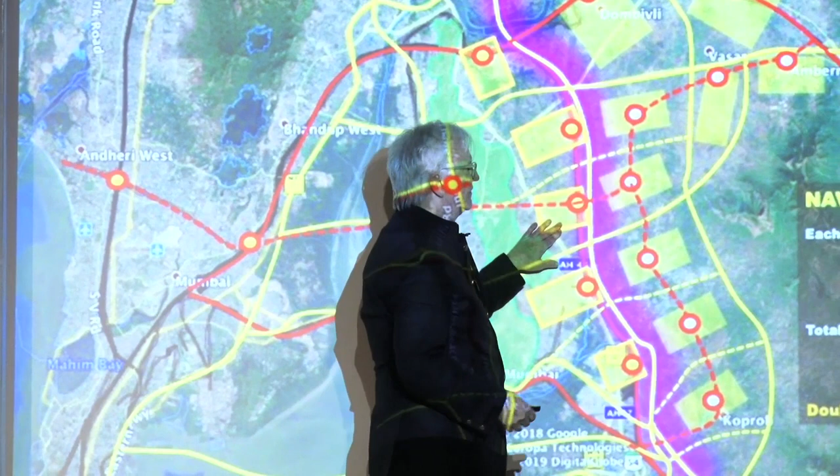And the further extension - each BUD means Balanced Urban Development Unit. Each BUD is 5 square kilometers with a density of 80 dwellings per hectare, which is the maximum density that we as Europeans accept, 20,000 inhabitants per square kilometer. That unit is 100,000 inhabitants.

The total expansion is for 2 million inhabitants, which is double the actual Navi. And if Navi has been built over the last 60 years, you have a century and a half with this - I'm joking. This will only provide a solution for 8 years to the amount of numbers that you need.

And then what I call the Thane Valley - industries should never be inside the cities. The industries have to be on the highways in the periphery, because you must avoid heavy trucks, heavy loads in the city, because it congests the streets and is dangerous. So industries, heavy industries, no.

You need the train as well, because the coal and the steel and so on comes by train. But industries which produce added value products, they never use the train. They use the truck and the airplane.

So you must produce the industries along the highways, and they serve as a buffer zone of the impact of the highways on the cities. You have to have green areas that flow in between and do not allow the emergence of these units merging, which is the conurbation, and a conurbation is the metastasis of the metropolis, and it has to be avoided.

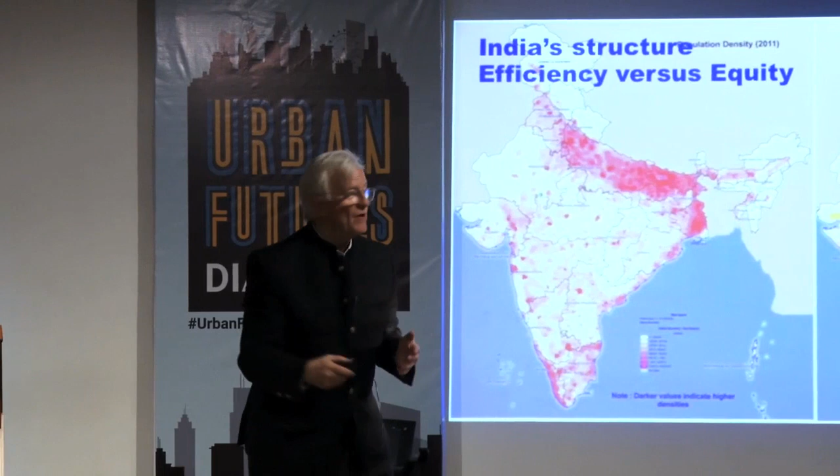This is the population of India, and obviously that population gives you the structure of India. Where the population is tells you the diagram of India. And the federal government has made this kind of diagram with the main lines of roads, rails, and so on, and you can synthesize it. This cannot be done by engineers — it has to be architects who do that.

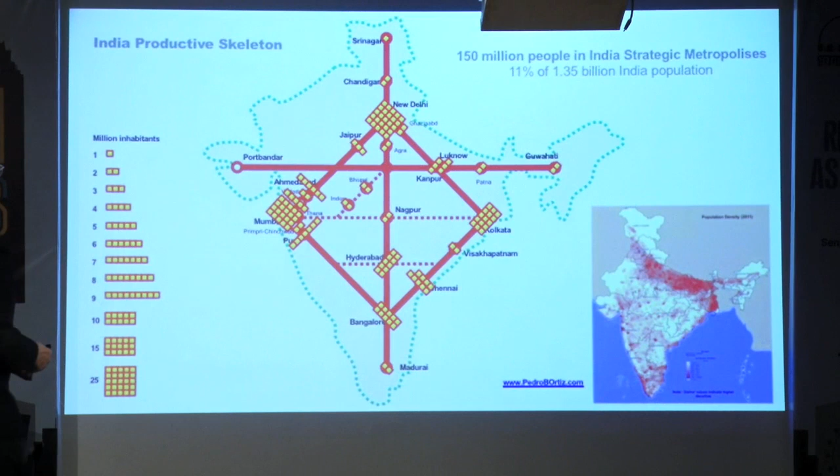So this is the diagram of metropolitan India. Every small square is 1 million inhabitants — New Delhi, Mumbai, Pune, Surat, and so on. You see immediately the structure of it. Is it useful? You will see that it's useful, because once you have the structure, that's what matters.

And the future of nations in the world is going to be represented by the power of their metropolises. There are nations where this is obvious: Manila is 66% of the GDP of the Philippines — if Manila doesn't work, the Philippines don't work. Cairo is 60% of the GDP of Egypt. Buenos Aires is 80% of the GDP of Argentina. If the metropolis doesn't work, the country doesn't work.

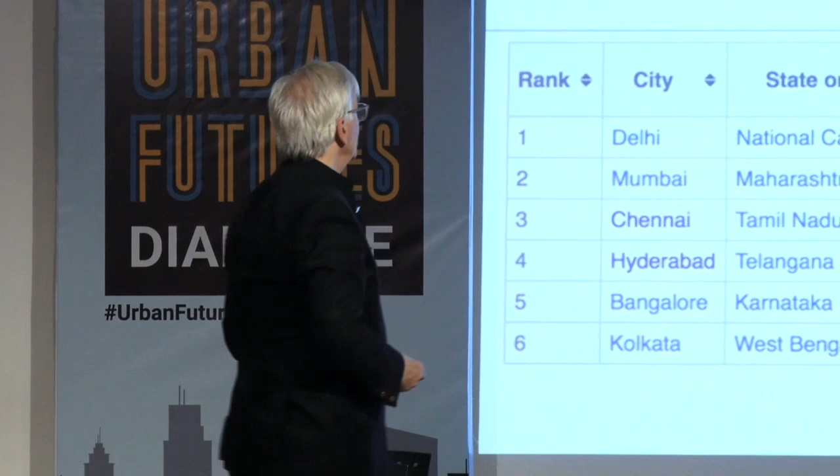India's metropolis don't work well. And if India wants to be a world power, and it should be a world power because that's your role, obviously you are not going to be a world power with this kind of metropolis working. India's GDP per capita is around $2,000 per capita. And only Delhi is around 4,600, because obviously Delhi is the political power, and the political power always has more money than the others. But Mumbai, Chennai, and so on, they are in the same range as the GDP of India.

Metropolis is a concentration of investments, of infrastructures. Metropolis around the world normally work 30, 40, 50% better than the rest of the country. And if you work at the same level as the rest of the country, that means that you don't work. And that has to be improved, essentially improved.

I'm not going to get into how you make that work, it will take a long time with congestion and so on. But you cannot take two and a half hours to go to your job, because that's 25% of the GDP of the metropolis going into commuting every morning and afternoon. So that is the kind of thing that has to be solved.

With those figures, I would love if you tell me, Pedro, you are wrong, these are not the real figures, and then I will change my discourse and my message. But obviously, with these figures, the metropolis doesn't work, and India cannot work like this.

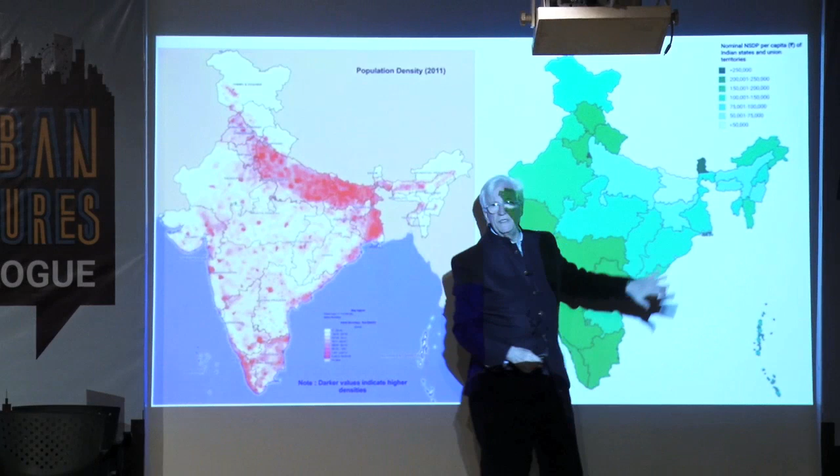But it's not only the population, it's as well the GDP. These are the highest GDPs, and these are the lowest GDPs. So immediately, when you see the two maps together, where the population is and where the lowest GDP is, you realize that where you, as a federal government, have to invest is in this area, far away from Mumbai. So that kind of social equity approach doesn't help Mumbai at all.

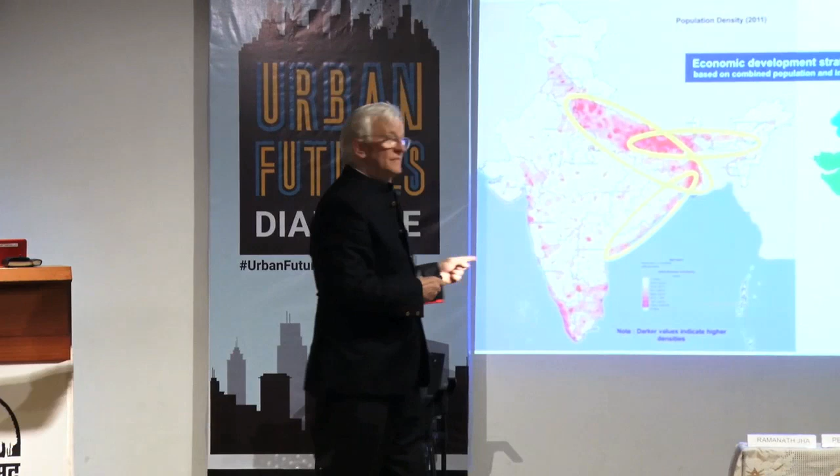You're saying yes, or am I correct? So these are the areas. If I were Modi, I would say, where is the maximum potential, first of social equity, second of growth, because if these areas remain at that low level, India cannot play the role it has to play. Where should I invest? This will be the approach: invest in social equity and economic potential in the long term. And obviously, you are very far away from those areas, so this kind of policy doesn't work for you.

You want Modi to invest in the places where there is already productivity, to make those places more efficient and to position India in the international world in the short term, not the long term. I'm not criticizing Modi. Anyway, this is what I was telling you before: social justice, equity, economic efficiency - the objectives, the dichotomy, the struggle, and the alternatives - it's a political decision, not a technical one.

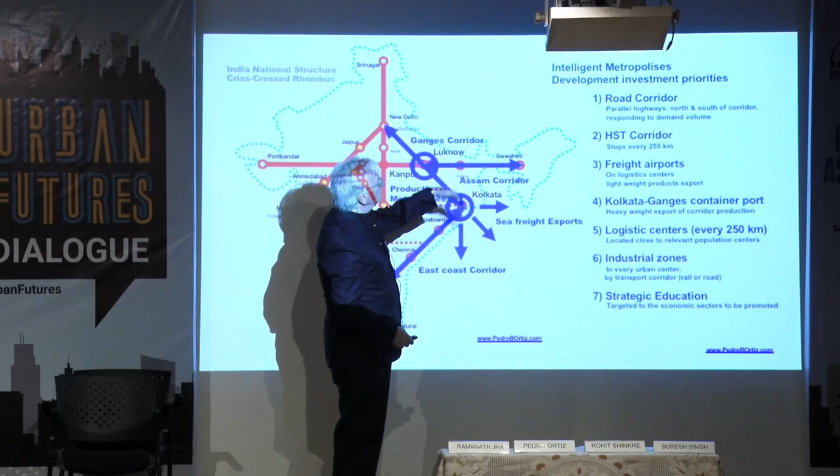So immediately you see that this corridor has to be developed, the one to Calcutta and Chennai, the Assam corridor, because they are the ones that require more investment. You immediately see how to develop these corridors: you need a road corridor, a high-speed train corridor, freight airports, a Kolkata-Ganges container port, logistics centers every 250 kilometers, industrial zones, strategic education. Strategic education is needed because a metropolis is like a computer.

You have the hardware and you have the software. The hardware is the computer and the software is us - we are the logiciel, as the French say, of the computer. What is worth in a computer is not the hardware; for $1,000 or $2,000, you change your computer. What is worth in a computer is the logiciel, the programs and the data bank, from which we work every month and get paid for it every month. And that is worth much more than $1,000.

It might be worth millions, depending on your work in society. So in a metropolis, what is not worth it - I'm sorry for us architects - is not the bricks and the mortar and the steel. That is nothing. What is worth in a metropolis is us, the logiciel, the data bank, the human resources, everything that we know, and the social resources, the programs - this is how we relate to each other to make that knowledge produce something positive for the metropolis. So architects, the bricks you are going to put are worthless.

I'm being nasty, but I mean, if you have social resources in a society, you have the software. You can destroy the country, like Germany after World War Two, absolutely whitewashed, but you have the Germans who are the social resources, the capital, the logiciel, and in 10 years, Germany was again the main country in Europe. If you don't have the software, like in Haiti, you have an earthquake, Haiti is destroyed, there are no social resources - we can be investing in Haiti for the next 30 years and we will not be able to develop Haiti.

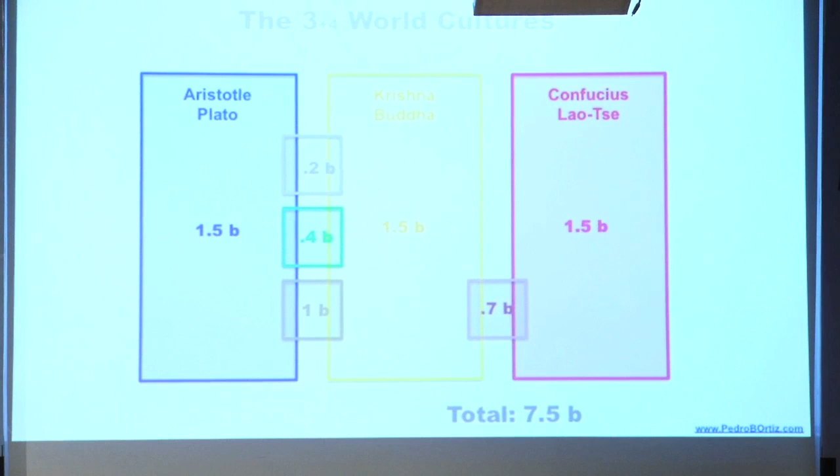So we are interested in you really becoming the third power of the world, because you will be closer to us than to the Chinese. The future is going to have three big powers in the world, but obviously not if your metropolises don't work, not if you stay at $2,000 per capita. The Western world is at $30,000 per capita. China is now at $12,000, but they will reach $25,000 in the next 17 years.

So India must grow, mainly in its metropolises. If the metropolises of India do not work, India will not work, and we need you. I am not saying this for your benefit - I'm saying it for my benefit. We need you to play the role of balance between the two antagonistic powers.

We are not going to get into a war - we are not going to fight, because it will take 5 minutes and the world will be finished. But it's going to be an ideological war of controlling Africa and other regions. So we really need you to become a third power, and that can only happen through metropolises. For those metropolises to work, you need the physical dimension, and that is your responsibility, architects. Your role in India and in the world for the next 70 years is essential.

So I thank you for that.